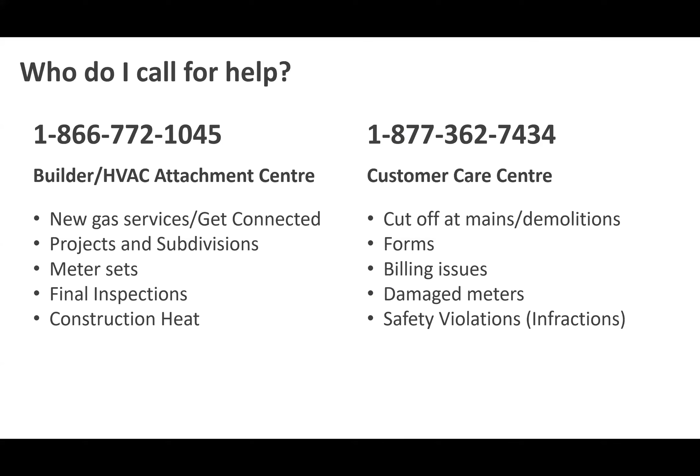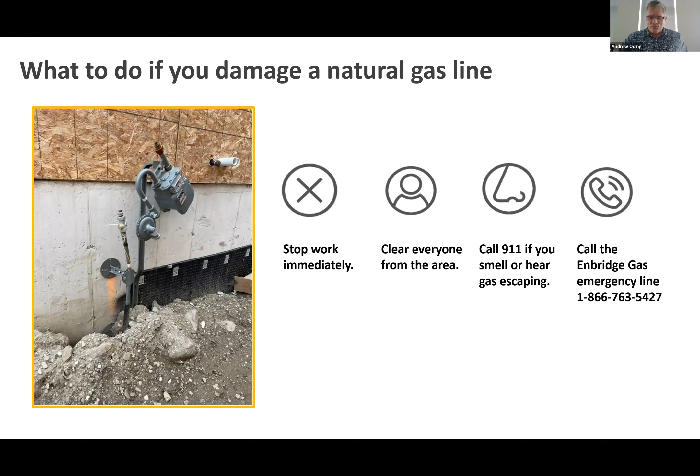And speaking of damaged meters, we always like to include a quick little safety moment in all of our meetings. And I thought it was a good time just to kind of review what happens if you do damage a natural gas line or a natural gas meter. You know, we're all human, accidents do happen. So if this happens, we ask that you stop work immediately, clear everyone from the area, call 911 if you smell or hear gas escaping, and then you can call our Enbridge Gas emergency line, which is 1-866-763-5427, and then we'll get our teams dispatched to take care of that.

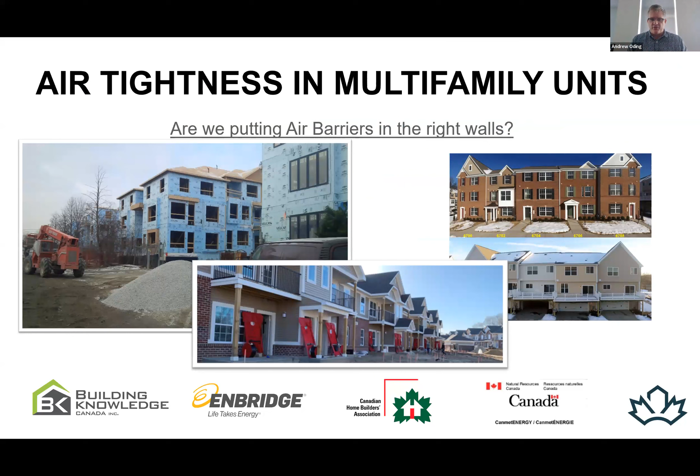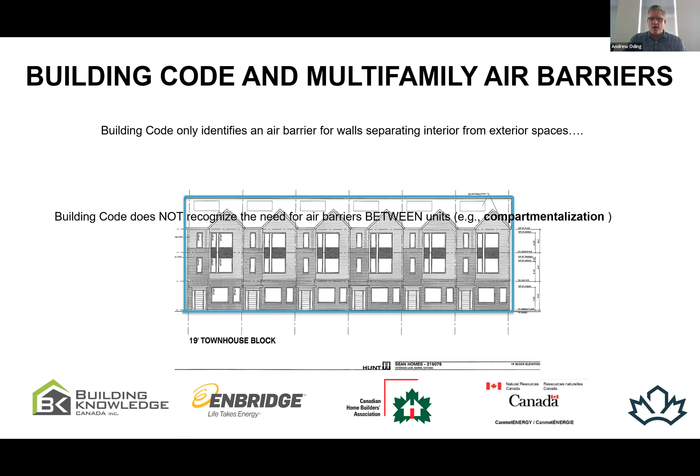So I'm going to jump into a very quick presentation, and really the idea, the concern we have in the industry, and this has been ongoing, is: are we really putting air barriers in the right walls when it comes to multifamily units? The thing we need to understand is that traditionally the building codes in Canada have really only identified the air barrier around the outside of the building, and they have forgotten about that air barrier between the units. This is what this study is about, this is what the conversation is about.

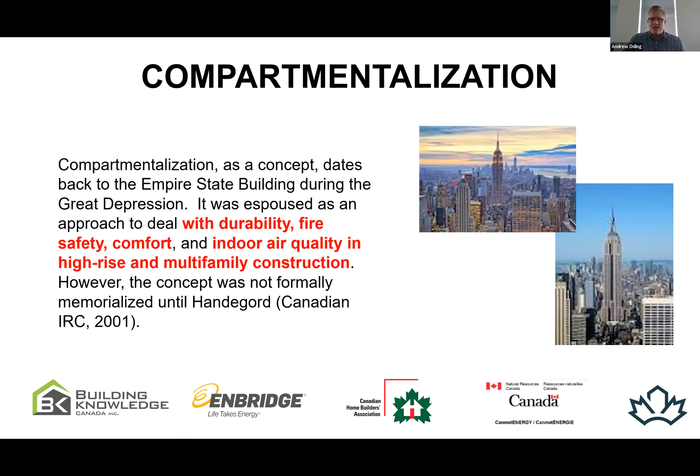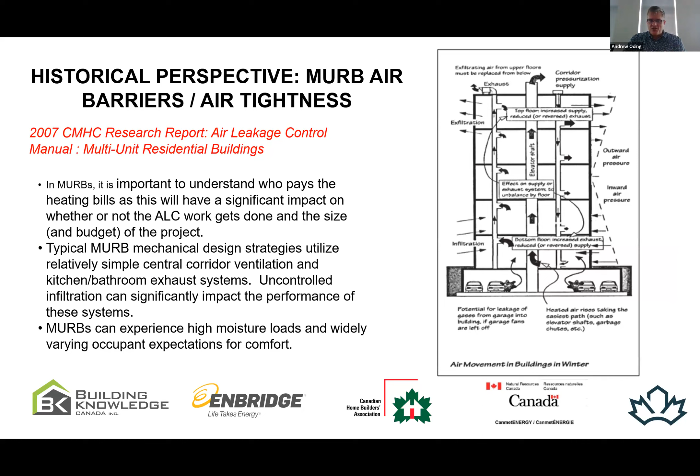The term we often use for putting air barriers between suites inside of a building is very old, identified during the construction of the Empire State Building: compartmentalization. If you go back to some of the original Building Science Digests, that was Handegord and Hutcheon back in the day, Canadian IRC 2001, there were even write-ups about the benefits of compartmentalization. Just a little historical context: there was also early 2000s research done by CMHC that identified the benefits of air barriers between units in multifamily buildings. And it isn't just energy, it was also about health and optimizing mechanical systems.

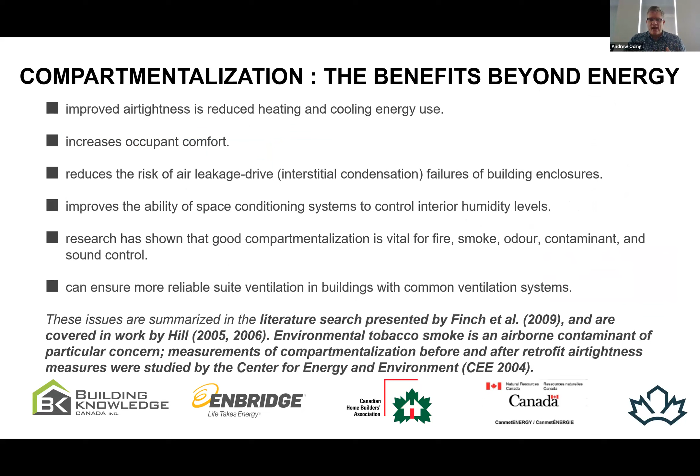Another study done in 2005-2006, you can look this up, was done by the Center for Energy and the Environment, CEE, by Finch and Hill, which identified that air tightness improves not just heating and cooling, but occupant comfort. It reduces odors, and it gives the mechanicals the ability to actually work in a building, and the ventilation systems.

The one thing we do need to understand, though, is if you ask any energy advisor across Canada today running these big red blower doors on multifamily units, and in the US where they're running blower doors as HERS raters, they will tell you that the air leakage, when you do a single point test on a middle unit, about 30 to 40% of the air coming into the unit is coming from the neighboring suite. And that is typically for a 1 hour design, a 1 hour double stud offset design.

Often in our industry, we've been told, well, you can do guarded testing, you can do multiple doors, so you depressurize the neighboring units and then you get a real test for that middle unit. The problem with guarded testing is it's very expensive, it's not easy to do.

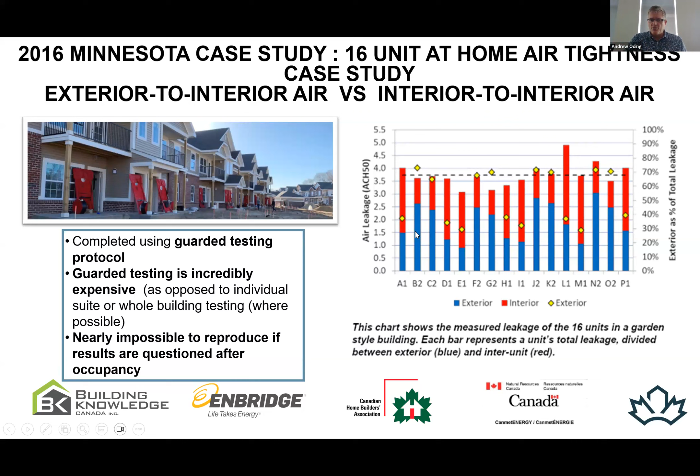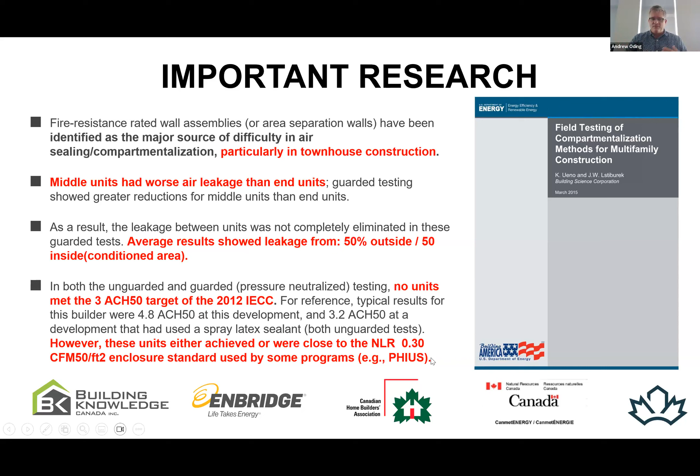Another study you might want to look at that's been formative is a study done by the Department of Energy in the US. This identified that when we look at these townhomes, there was tremendous leakage between units on middle units. They suggested that 50% of the leakage was coming from the neighboring units. They looked at that in developing the IECC3 air change target and found that a lot of multifamily units, even in the US, couldn't even meet the 3 ACH, and that typical results were more between 4 and 5 ACH. We now see programs move to that point, like PHIUS and others, instead of using ACH, they've moved to NLR, which is a different metric.

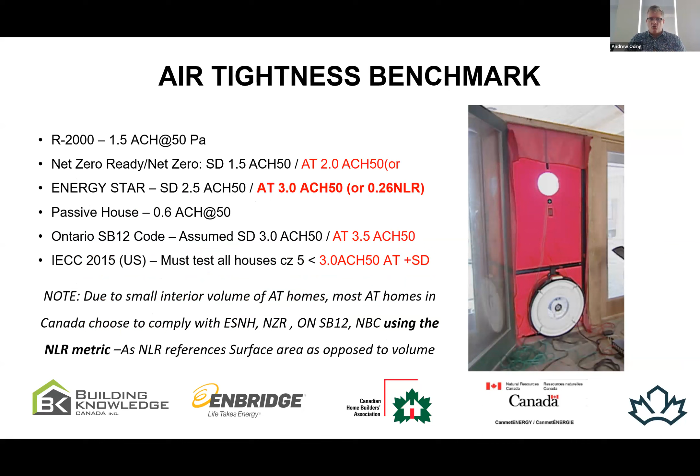We'll leave this with you to look at later on. The study suggests why the move from ACH to NLR was important. Here's some baseline references as to what the air tightness standard is for multifamily. AT here stands for attached units. You'll see that Net Zero Ready in Canada is 2 air change or the NLR equivalent, 3 air change or the NLR equivalent, and so on. These slides are just for your reference.

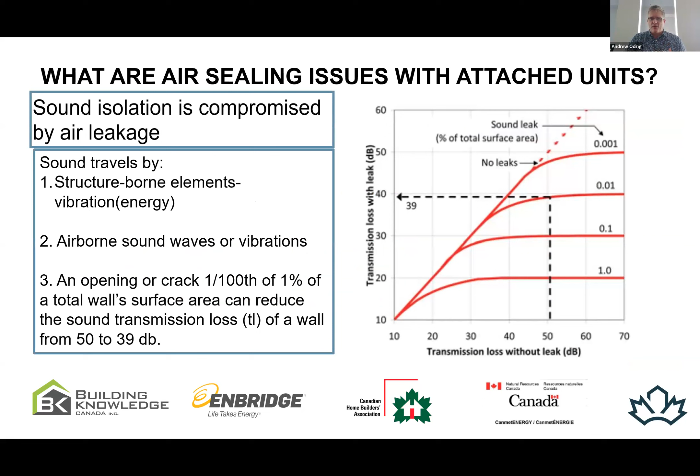A little study done by the Owens Corning team a number of years ago showed that when you have holes in demising walls, it significantly impacts the sound transmission. Even a tiny crack can actually decrease the sound attenuation performance. One of the solutions to this in Canada over the last 10 years has been to put an air barrier material in this one-hour assembly, and this is sort of standard practice here. The only issue is there's nothing in the code to guide this.

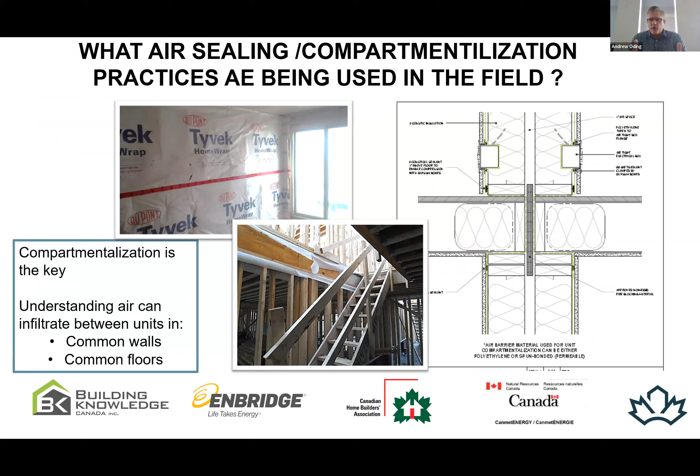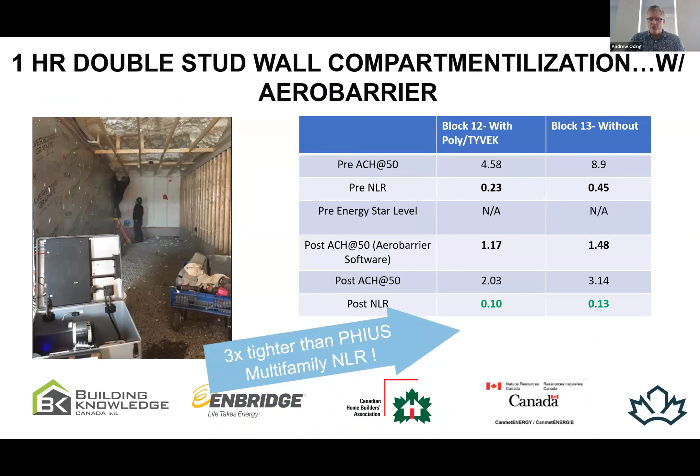There's often been the question, well, what if we add this spun bonded polyolefin to the assembly? What does it mean for the fire rating? Hopefully Michal Bartko, our guest here, can help us with that. The other thing we see is products like AeroBarrier that can help with compartmentalization and get down into some of those low NLR, low ACH ranges.

All right, I'm going to pass over to Frank Lohmann. Frank, if you want to give us a little bit of context from the point of the industry, the home building industry, and the Canadian Home Builders' Association.

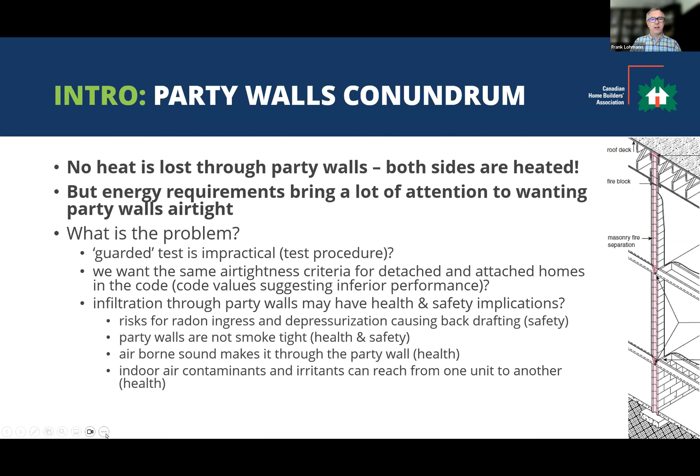He mentioned the safety and health implications as well, but this is outside energy, of course. So it would be to build better practice party walls to really manage, for example, radon ingress or the risk of depressurization, to make them smoke tight, not just for indoor air quality irritants, but also for, who knows, cannabis, or maybe even smoke from fire. You mentioned the airborne sound as well. So all of those are really good reasons to build the party walls airtight.

And what we found about, I think it was 2020, Michal may correct me, is like if someone wanted to do it better and right, what is the best way? We started looking, and Andy said, yeah, there isn't really much in the code. There's some stuff in the builder's manual, CHBA's builder manual. I'll show you a few snapshots in a second.

And then there was, I guess, a difficulty with offset exterior walls meeting party walls - how do you detail that? And there are other construction process related difficulties sometimes, because if you have multi-story attached units, there's often openings being left in the entire unit for trades to make it easier to pass from one unit to the next.

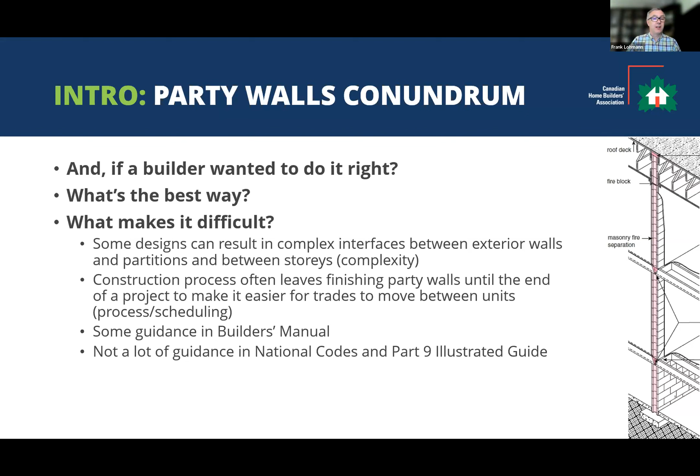And then they get left open until the end, and sometimes those closings lead to some leakages. And as Andy said, there isn't much information in codes, and not even in the illustrated guide.

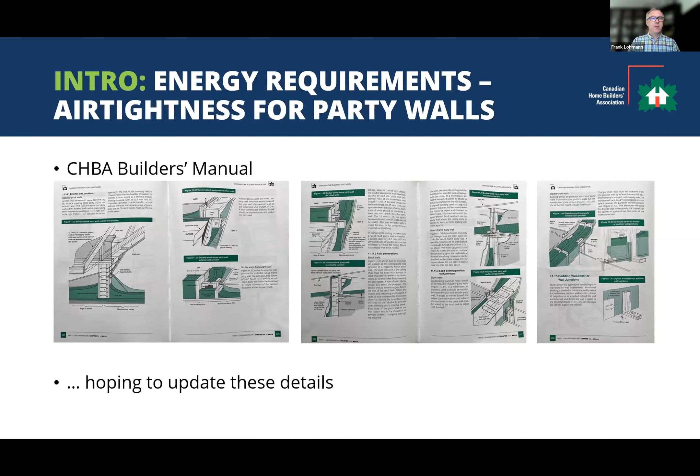I'll show you just snapshots I took this morning from the CHBA Builder Manual. I'm not going to go through those in detail, but there's quite a few different approaches, whether it's masonry, curved, offset walls, or double stud.

So in a nutshell, what's the problem? Well, the common part of all the problems we just discussed is that they deal with air leakage. But what's not known, or hasn't been verified until this point, is what actually constitutes best practice. Is it fastener? Is it openings? And I'm hoping that Michal will talk to us about that.

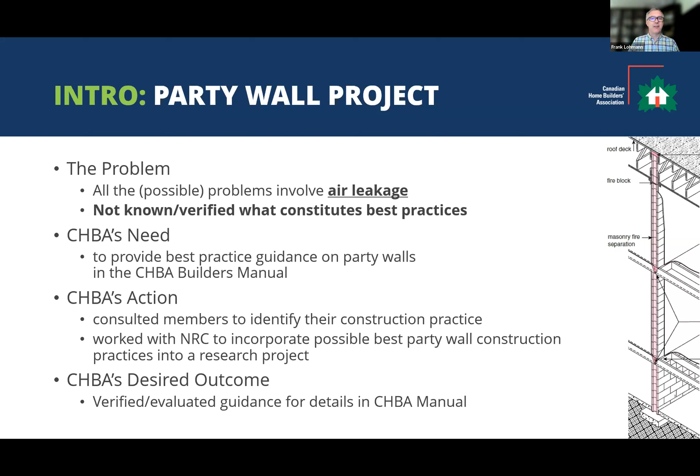And so what was our need? Well, we wanted to really nail down what best practice is so that we can broadly communicate this, include it in our manual, and also communicate it to our members and others in the industry. Our action was, at the beginning of this project, to help NRC identify common and potentially best practice in the construction of these partition walls, so that NRC could incorporate them into an evaluation or verification validation project. So our wish was that we will have validated, evidence-based best practice in our manual.

And with that, before I pass it to Michal, we wanted to run a couple of questions by you, because there's still open questions and we'd like to know what in the last 2 or 3 years may have changed. I think it's Stacy or someone running those polls.

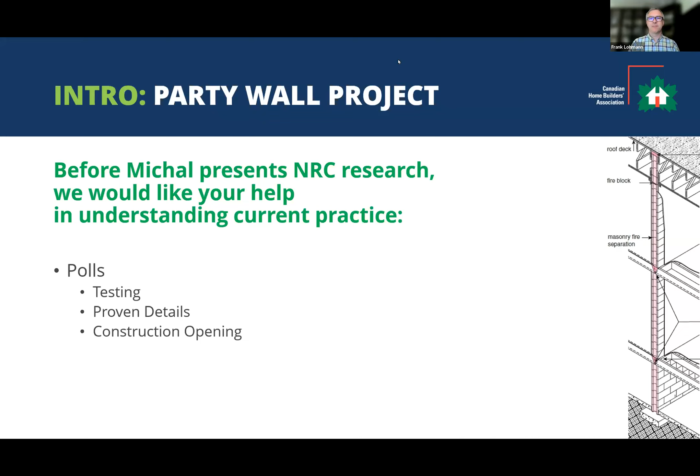Oh, there's the last one. Sorry, we did have one. Yeah.

So, do you have callbacks for noise or indoor air quality? Sorry, typo, I may have missed the I there. Indoor air quality, are there any effects of those we mentioned, non-energy related obviously, but that lead to callbacks? Noise is probably the biggest one we could add to our list of benefits of doing this airtight.

By the way folks, when you do give answers it is anonymous, so if you say you have issues we can't actually track it back to who put the answer in. So just be open and honest about some of these things.

We do know in general that since the requirement for air tightness and better air tightness in homes has occurred in the building code, we have seen an increase in warranty claims around sound and odor transfer concerns between units. So this is interesting.

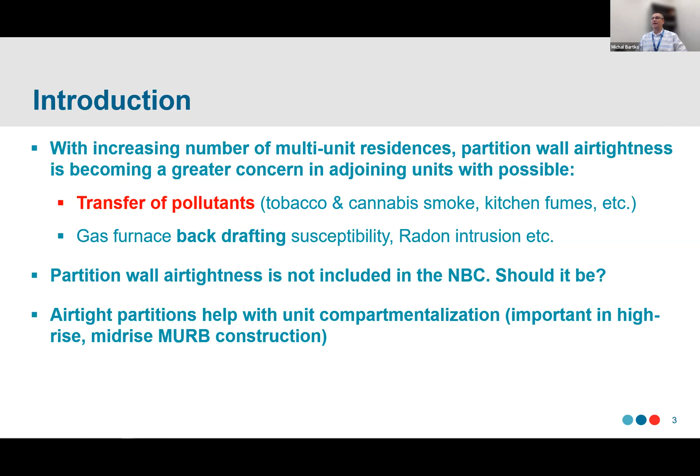We believe so. And also, as I believe it was Andy who mentioned, compartmentalization is a great benefit, and airtight party walls definitely help with that.

A little bit about background on how this project came about. At the beginning of 2020, over 3 years ago, we approached our key stakeholder, the Canadian Home Builders Association. With their help, we were able to gather data from the CHBA membership, giving us the input on where the industry stands in phase one.

Then we created a small committee and had several meetings. We introduced the project, asked the questions, gathered the answers, and by the end of 2020 we had approved a list of specimens to be tested in phase one.

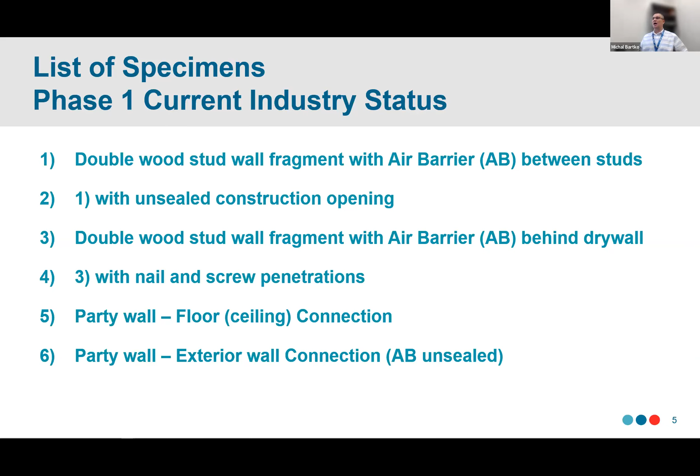I'm not going to spend too much time on this slide because I'll be talking about each specimen in more detail so you're aware of what we did in phase one. It's enough to say here that we tested 6 specimens.

Specimen number 1. Based on the input we received, we defined specimen number 1 as a double wood stud wall with an air barrier in between the studs. On each side we have a drywall system, fire rated and regular, then a 2x4 wood stud filled with insulation, which is fiberglass acoustic insulation, not thermal.

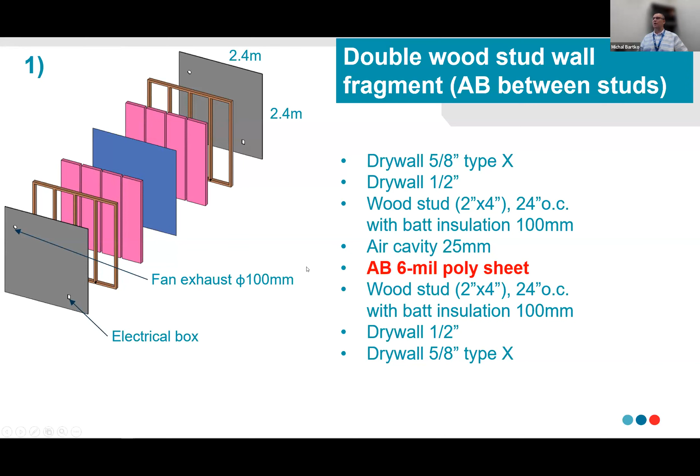Then in between the studs there is 1 layer of 6-mil poly sheet, attached to one of the studs, with the assembly mirrored on the other side. The poly sheet was attached on one side, with a 1-inch air cavity in the assembly allowing the air barrier, the poly, to balloon a little bit. I'm giving away some of the results here, not saying this is inherently a good thing, but this is how we built specimen number 1.

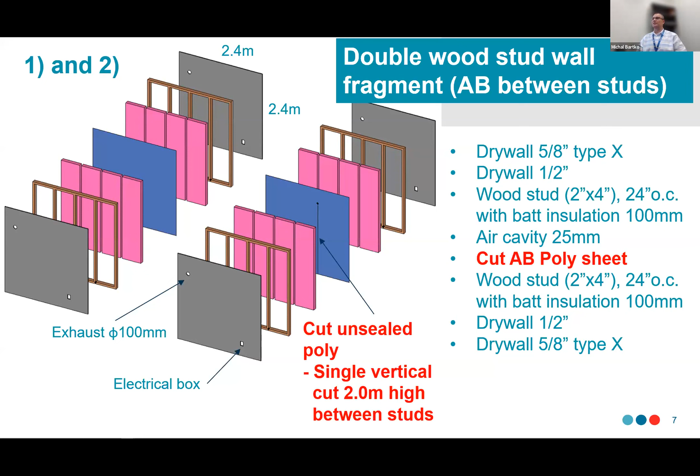We hear, and we could see in the polls, that these things happen on site. So the effect of such things on air leakage was investigated.

Specimen number 3 was similar, again a double wood stud 2x4 with identical drywall systems on both sides. The difference is the poly sheet was not between the studs, but there were 2 of them on the outer side of the wood studs. In phase one, we only tested 6 mil poly, consistent with the input we got three years ago.

I don't know if I mentioned before that the specimen size was 2.4 by 2.4 meters for all specimens, because this is the size of the facility we have at NRC.

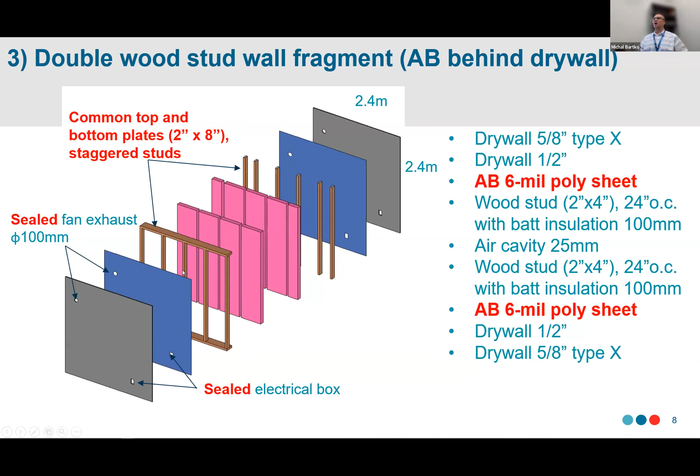We also investigated the effect of openings or penetrations into the drywall system, as well as the poly sheet in this case, with an electrical box installation and a simulated exhaust fan penetration.

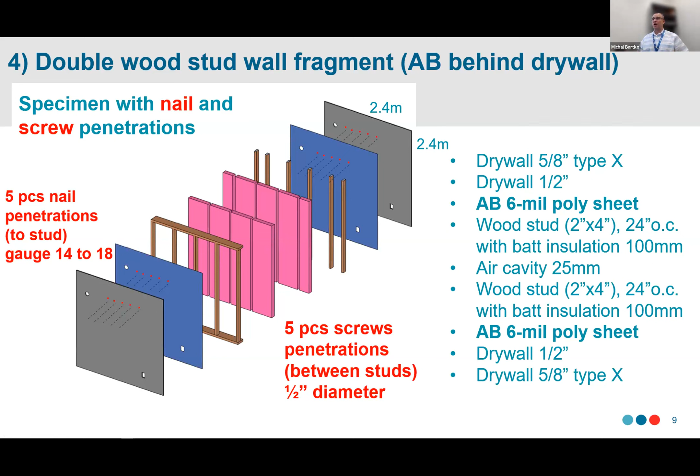Specimen number 4. There was a need to address the effect of penetrations — you're in your living room and you want to put a painting or mirror on your party wall, which causes air leakage penetrations. So we installed 5 nails into the stud locations, penetrating the air barrier poly sheet and attaching to the studs, and 5 screws with nylon plugs going through the drywall and the air barrier on both sides.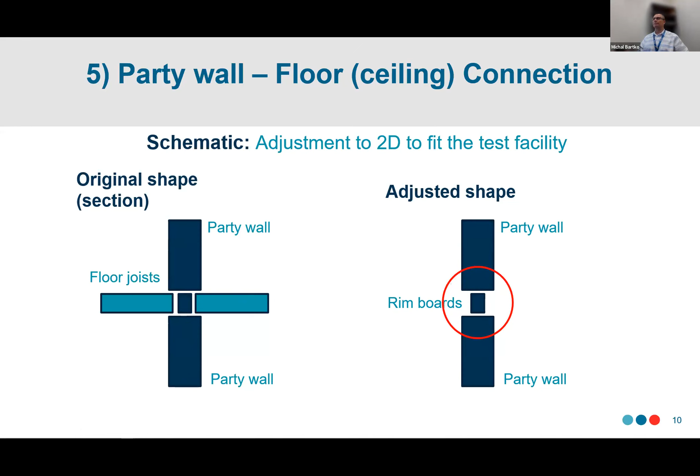Specimen number 5. It was believed we should test the party wall and floor connection detail. On this slide I'm presenting adjustments we had to make because our facility can only do 2-dimensional specimens, while the detail on the left is 3D. This is the party wall of the lower floor — a vertical cross section showing the lower floor party wall, floor joist, and the top floor party wall. We removed the floor joist, leaving just the rim boards in the specimen.

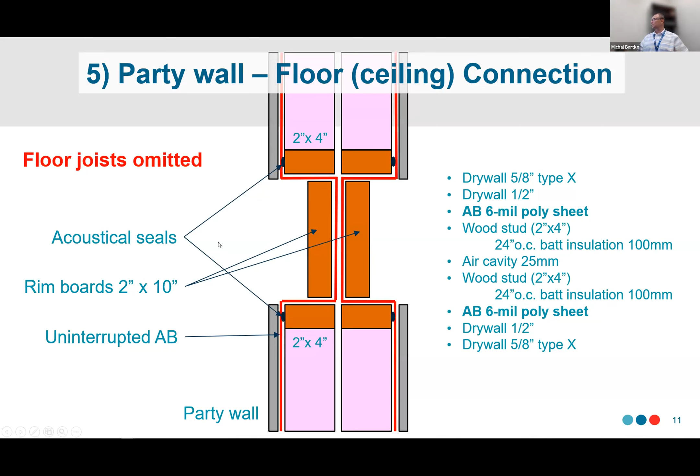We used a 2x4 wood stud with a poly sheet air barrier on both sides, and the poly sheet was interrupted and sealed for the bottom floor around the rim board, and again for the top floor. So we had 3 pieces of poly sealed together in 2 locations. Rim boards were 2x10, which we believed is identical to what's commonly used in construction.

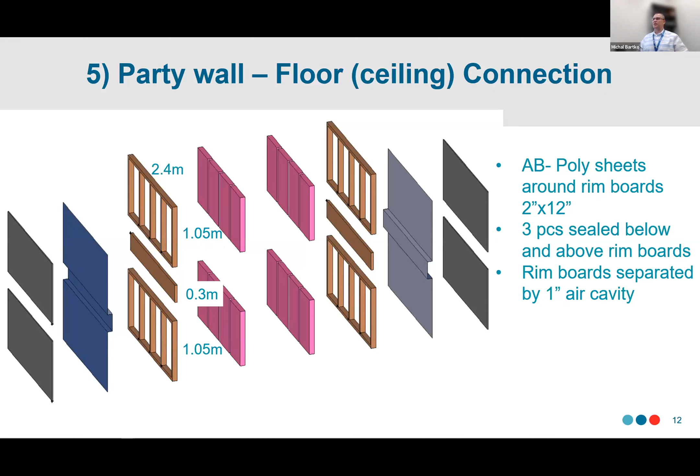Again, this exploded diagram is just a repetition, prepared for our technical officers so they know how to build the specimen with the correct dimensions. And here is specimen number 6, which is a connection of the exterior wall with the party wall.

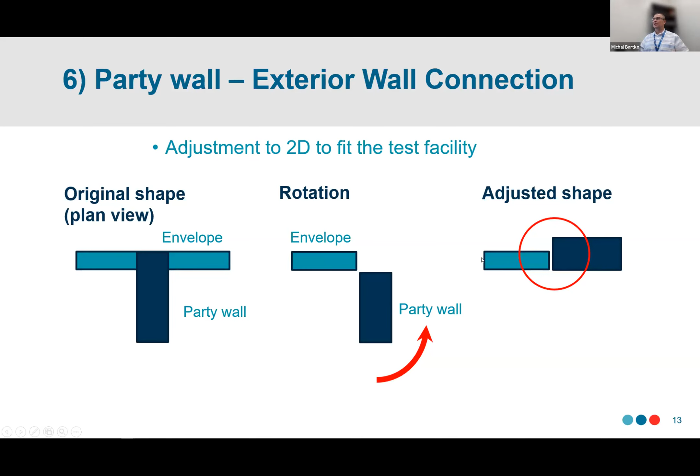Again, 3D had to be adjusted to 2D. Basically, what we did is we removed the portion, shortened the party wall, removed the section of the envelope, and rotated the party wall into one level. This is as close as we could get to the reality.

Again, having the limitations of 2D testing assembly, testing facility only, this resulted in this detail: on the envelope side on the left, we are using 2x6 wood stud with a poly on the interior side and Tyvek weather barrier on the outside. We ignored the air cavity and cladding; we didn't deem it appropriate or important for cladding to be included in this assembly.

And again, on the party wall side, two wooden studs 2x4 with a poly sheet on both sides. One important note here is that this detail, the connection between envelope and party wall, was not sealed. The poly sheets were not connected.

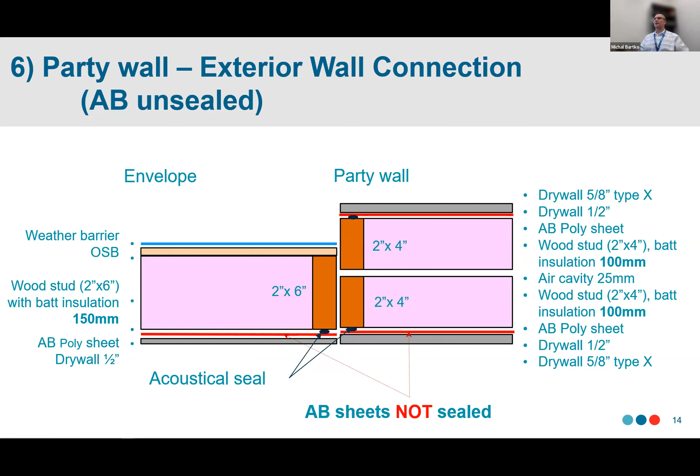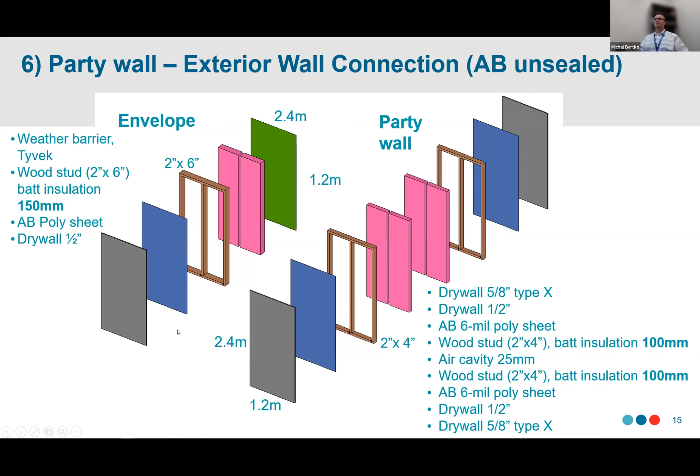We were initially going to run the test with poly unsealed versus sealed, but as we'll see from the results, it was not necessary because, I'm getting ahead of myself, the leakage of this wall was zero, probably because the two drywall systems were mudded together as they would be on site. Again, this is the exploded diagram, building envelope on the left and party wall on the right.

Okay, so these were the specimens.

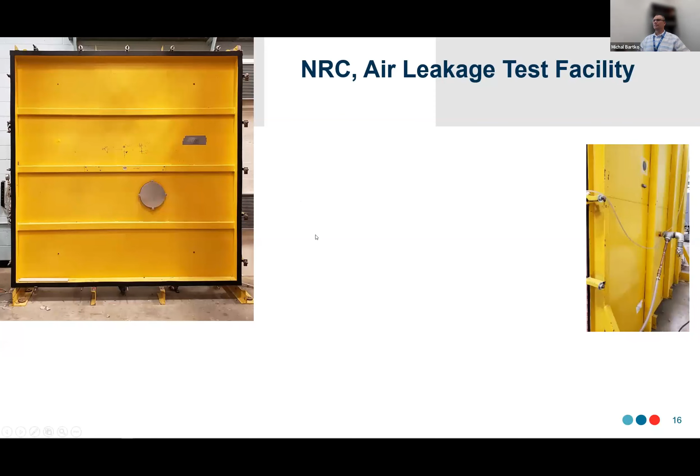And this is the facility we have at the National Research Council. It is a metal chamber, not too deep, maybe only 15 centimeters deep here on the right photo. Airtight, and we can see the hose and air inlet from the back, which is in this location, with dispersion of air so it's not focused on one area only, but spread regularly along the chamber.

So then we install the specimen against the chamber, as we can see here, and via our vacuum or fan, whatever we call it, with the data acquisition system, computer, and pressure sensor system, we were able to put air inside or actually take the air outside. So the fan or vacuum worked in both directions, meaning we could introduce positive and negative pressures on all the specimens.

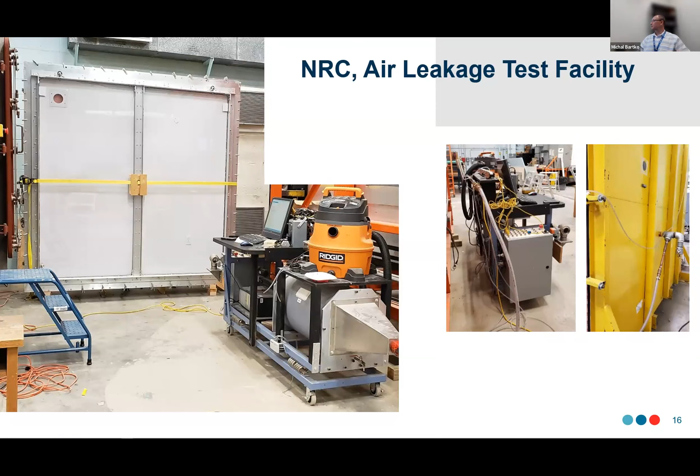I hope I didn't miss anything, and I hope this makes sense. So let me continue to the test procedure.

There is no ASTM standard or any other standard specific for party wall testing, so we adopted what is available: ASTM E2357, standard test method for determining air leakage rate of air barrier assemblies. The standard says, and we followed this procedure, that each test must consist of at least 7 points in one test, 7 points being different pressure levels.

So we were varying pressures from 25 pascals to 300 pascals, obtaining those 7 points in between: 25, 50, 100, 150, 200, and so on. And we did 3 tests independently for each specimen.

The diagram on the right shows we have 3 tests there, and these are quite corresponding results. As you can see, all 3 tests showed quite identical airflow rate. The airflow rate was calculated using this equation in red, using flow coefficient and flow exponent extracted from the test equations on the right, and leakage at 75 pascals was calculated for each specimen, then these 3 values were averaged.

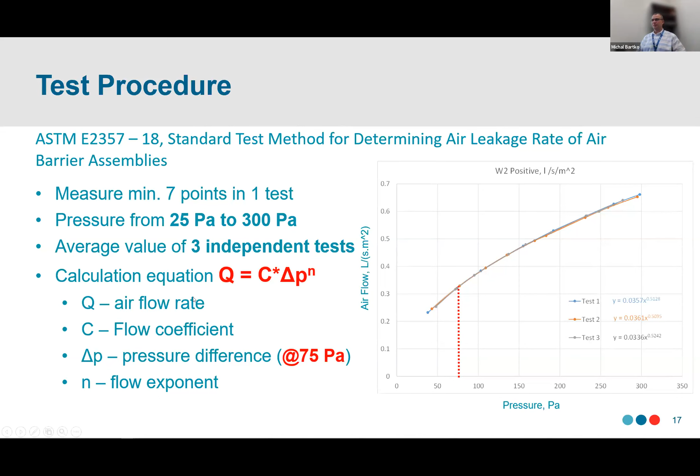I digressed. Coming back to the test results of phase one, I hope this is clear and nicely visible. I tried to make these small diagrams correspond to what is being written here.

This one, with poly in between, had quite large leakage. I must say I was a little surprised to see this, and also the difference between positive and negative pressures was considerable. Coming back to it, thinking about it and looking at the raw test data, we were able to determine that the ballooning I'm mentioning in the specimen was not really a good thing.

The poly was stapled to the studs, and as the pressure of 300 pascals positive pressure was applied, the air barrier 6 mil poly ballooned, and these connections at the places of staples were just torn. That's an assumption, we didn't open the specimen yet. We will do it in the near future, and then this assumption will be confirmed or not. I cannot tell you at this point.

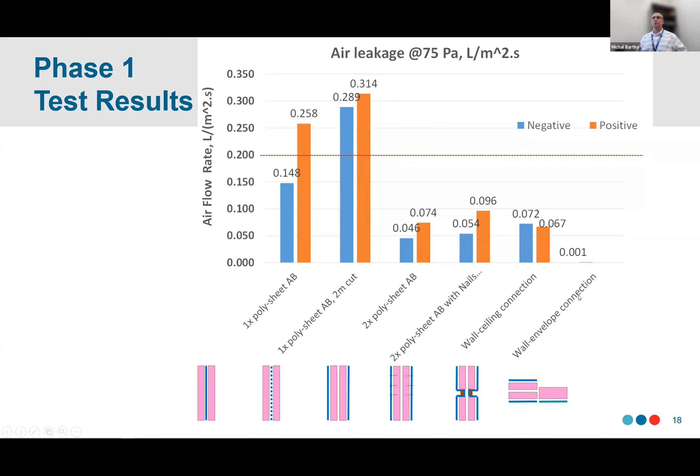Maybe now, if we took that specimen after 3 years and retested it, with some cracks already, the result would be different. We didn't test that just yet.

Okay, so I'm concluding phase 1. We were anticipating that specimen 1 would have lower air leakage because there would be no penetrations. In real life, most probably they will not, because there is never a 300 pascal pressure difference on each side. We get maybe 10 or 20 pascals, maybe if there is a stack effect. So the result might be a little bit skewed by this fact. Nevertheless, this is what we get, this is what we presented. The difference between positive and negative pressure tests could be due to valving and/or ballooning.

And then specimen 3, air leakage was lower than the previous specimens. Again, we are assuming that since the air barrier, the 6 mil poly, was firmly held between the studs and insulation on one side and the drywall on the inside, there was no movement possible. The air leakage was much smaller, much better.

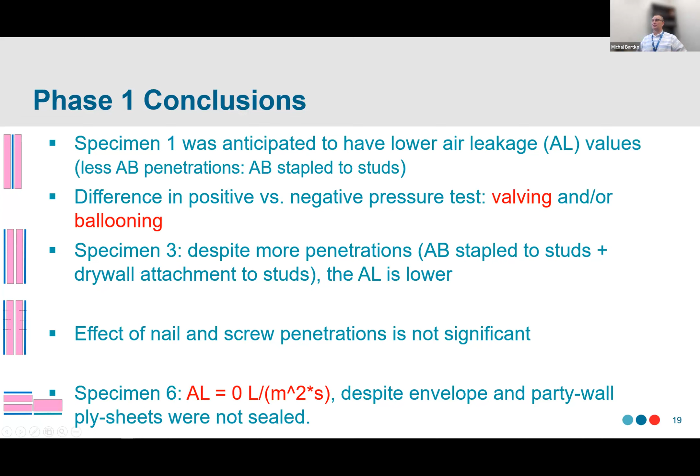The effect of nails and screws was there a little bit, but it was not significant. And again, as already explained, specimen 6 was not leaking at all, to our surprise.

Once all these tests were done at the beginning of year 22, basically 2 years after the project came to be, we elaborated the interim report, published it, and presented the results to that small committee of CHBA membership, with questions like: this is what we get in the first phase, and what should we test next so that we get good input data for the future code change request?

Then specimens 5 to 8, as I mentioned on my title slide, there was a suggestion that if this is new to the code and we're going to use spun bonded polyolefin membrane, there's no acoustic and fire evaluation for those. So I compiled this list, came to my superiors, the decision-making people, and said people want to do this, give me the money. And believe it or not, they did.

So I'm going to talk about the next steps chronologically. As a first step, fire testing was done. Our fire department was keen to test these new specimens, and I was able to proceed fairly quickly with them. That group has its own facility, called the NRC Wall Furnace Test Facility, and there's a standard procedure to run such tests.

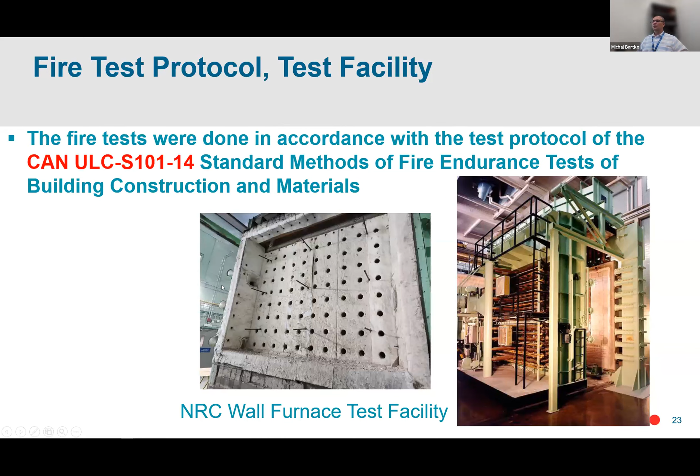In the facility, you can see the gas pipes leading to burners evenly spread over the area of the specimen inside the chamber. They also have cameras—two on the side—so they can monitor what's going on in the chamber, because it's sealed and tight and we can't see the fire from the outside.

So again, those specimens 2 and 3 from the previous list were built. The size is different—we used 8 by 8 feet for air leakage testing, but the facility for fire evaluation uses different specimen sizes, 3 by 3.6 meters, though the assembly was identical.

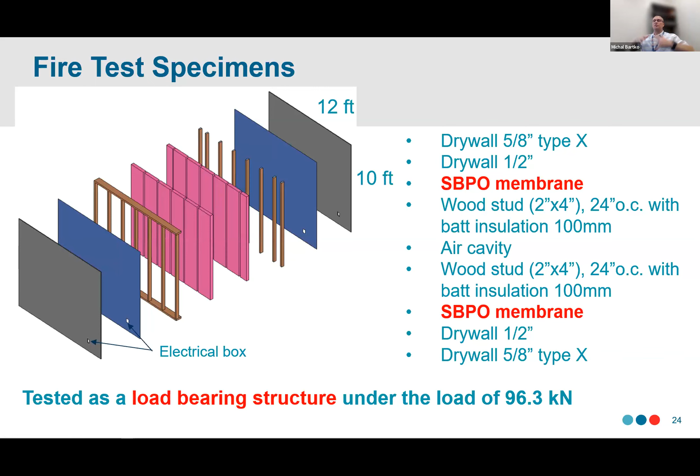I also had a specialist calculate the load bearing of that wall, so it was tested under a 96.3 kilonewton load from the top.

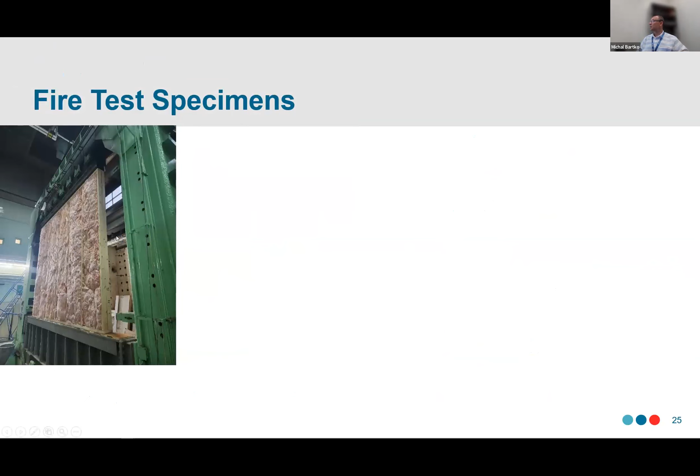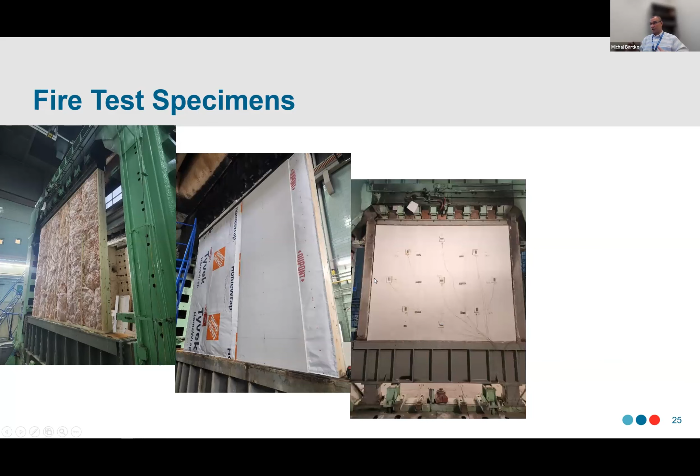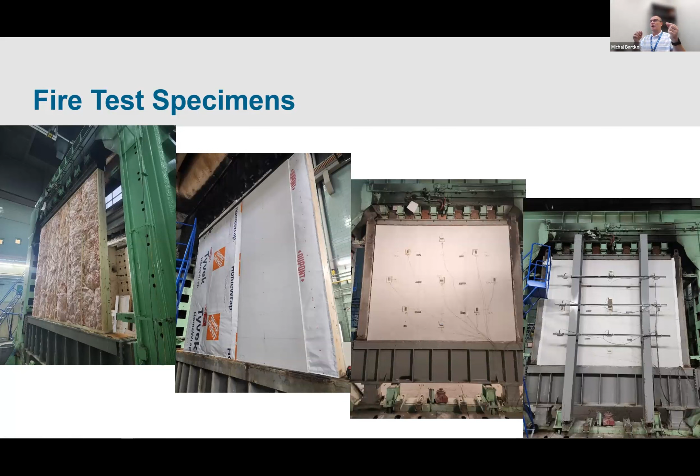I'm including some photos of specimen building. We can see double studs here with fiberglass insulation, then the stage where spun bonded polyolefin has been put in place, followed by the drywall system. The specimen, according to the dimensional standard, was instrumented with temperature sensors in this array, plus displacement sensors. Since the system on top was applying load, it was expected that at some point the specimen would crack and collapse, and the displacement sensors were used to see where and how much, and what comes first.

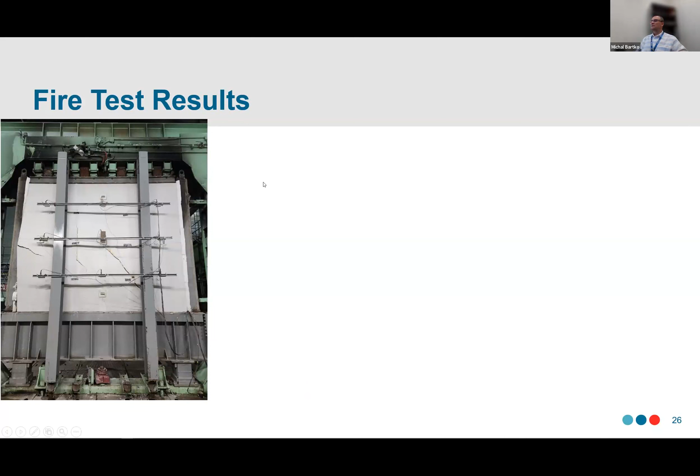It was fun, let me tell you—experiencing this test was really exciting for me. I'd never seen anything like that, and I'm showing you the results already. You can see the cracks from the displacement, and the collapse of the specimen is visible here. When the chamber opened, we saw the other side of the specimen exposed to the fire.

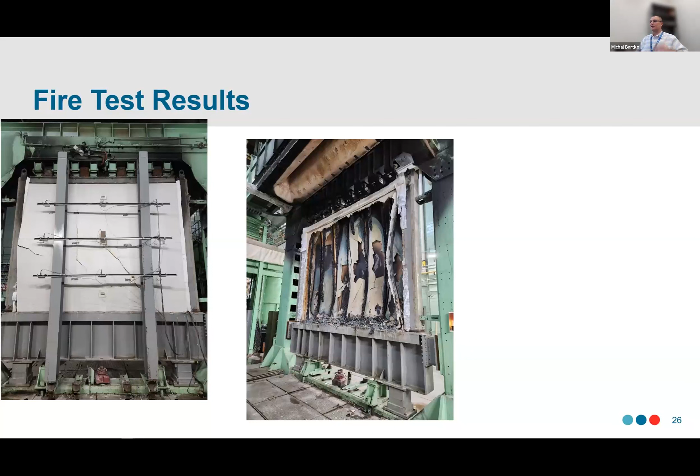I was surprised to see all the studs gone, yet the periphery frame could still hold some of that load until it crushed, of course. And then there's the detail of the electrical plug on the side that was unexposed to the fire.

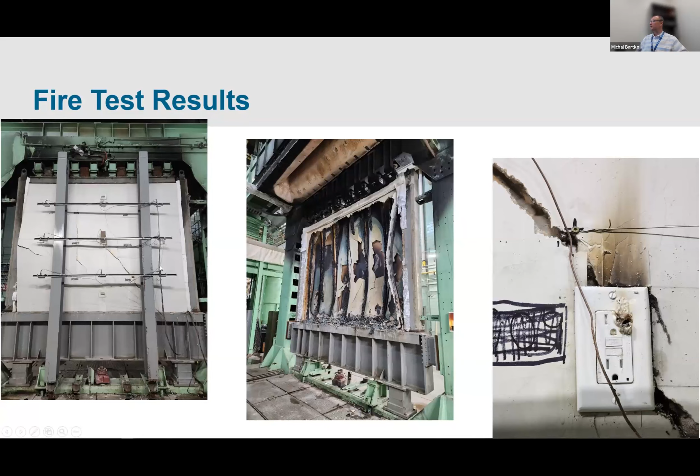You can see some smoke coming through and making its marks, but the test was interrupted as soon as these cracks, this collapse of the specimen occurred, which happened after 75 minutes versus 72 minutes for sealed versus unsealed spun bonded polyolefin air barrier respectively. What I mean by sealed and unsealed is that for unsealed, we used staples only at the whole area. For sealed, we had acoustical sealant at the periphery, and the penetration, the electrical box, was taped up, so there was no air movement. It gave us 3 more minutes. I was quite pleased with these results, and I hope that you are too.

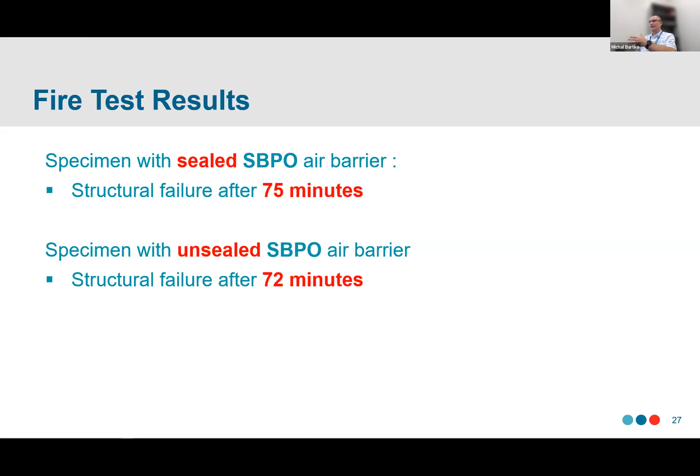Yeah, that is very interesting. Shall this make its way to the code at some point?

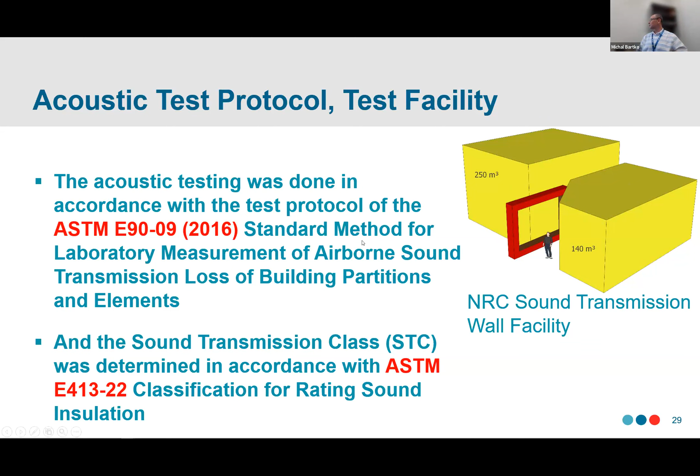So at the NRC sound transmission wall facility, I don't have a picture because it's actually a building. It's 2 chambers, really large, 250 cubic meters and 140 cubic meters, next to one another, with a spot where this red square comes - that's where the specimen is being put and will be slided into that facility. Then one chamber is a noise source, and another chamber is a noise absorber, and basically various noise levels are being monitored on both sides of that wall assembly.

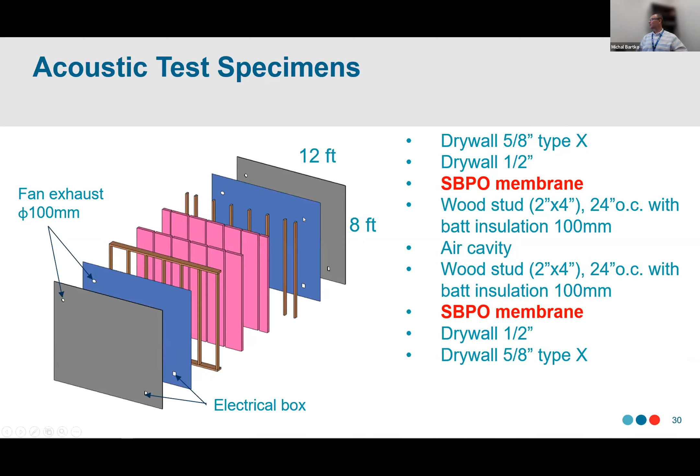Again, sealed versus unsealed spun bonded polyolefin membrane was used, and specimen size - it's actually unfortunate, I must say, that each facility has a different specimen size here at NRC. So we had 12 by 10 for fire, and we have 12 by 8 for acoustic.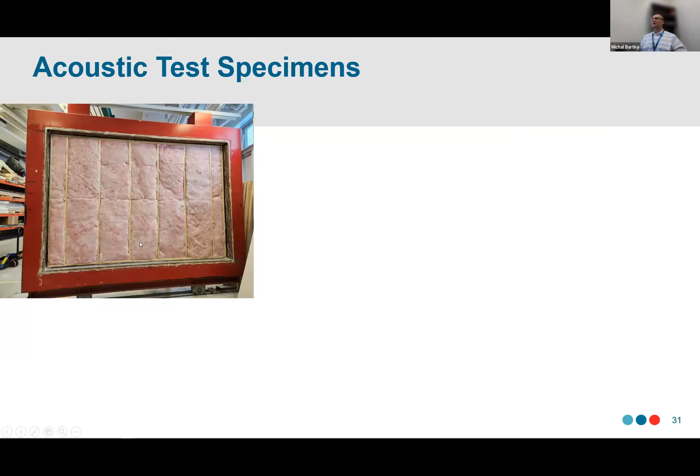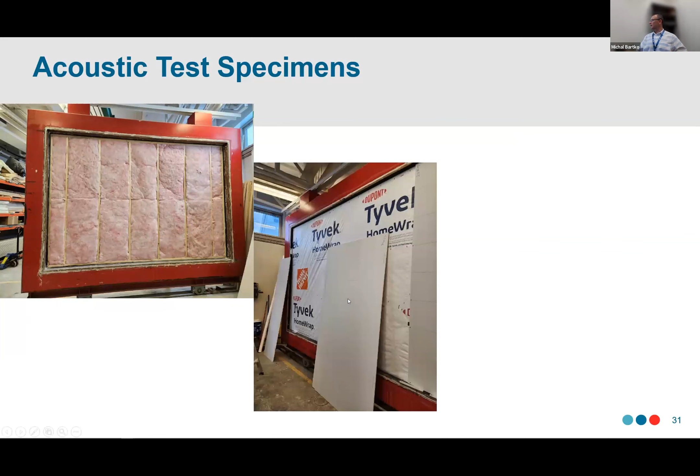So here is the red frame that I showed you on that diagram, and here is the building, the specimen being built directly into it. You can see on the bottom there are some wheels, some mechanism that makes this red square mobile. So basically, you build the specimen outside of that test facility, on top of insulation, some membrane, and drywall came. This is the final specimen in that frame, and one more photo where the frame was slided in between, and I am inside one of those chambers taking this photo.

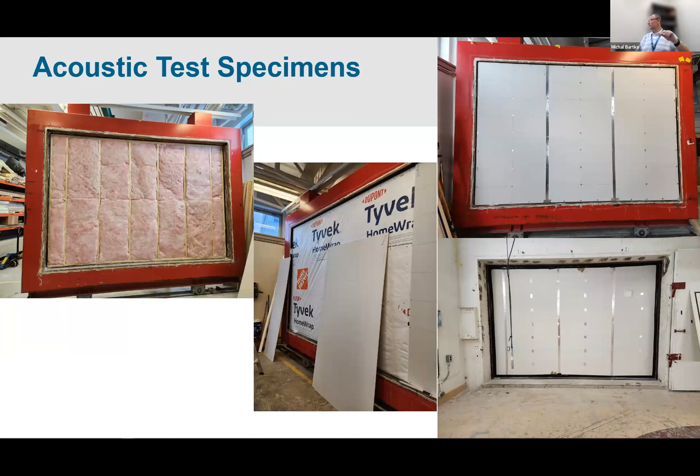Of course, during the test, you don't want to stay in. It's really noisy. It's a very strict test protocol. So basically, what happens? I do the photo, they drag me out, they lock the door, they take me upstairs, and they run the test. And from this control room, we are hearing noises - louder ones, less loud ones, high pitch and lower pitch. And here are the results.

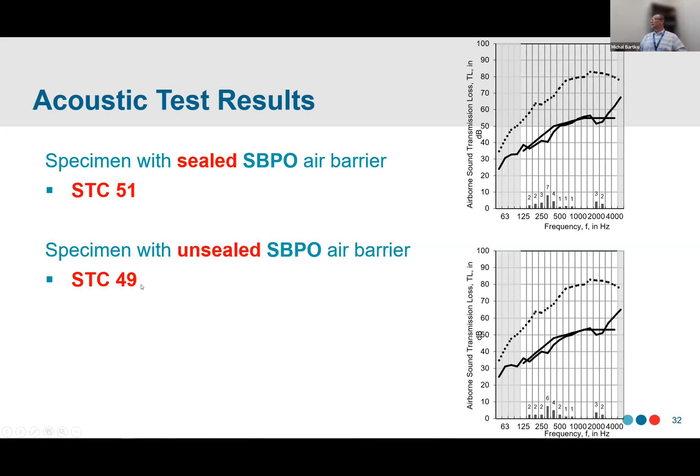Again, the open air, unsealed air is affecting a little bit the acoustical performance. So the sealed, or the lower air leakage, is just better for all purposes here.

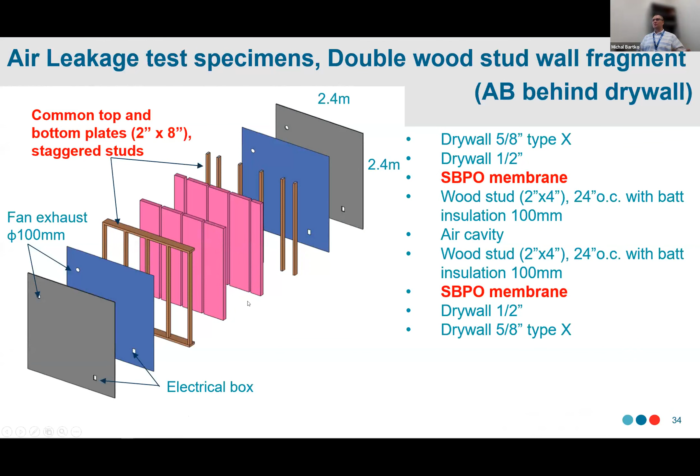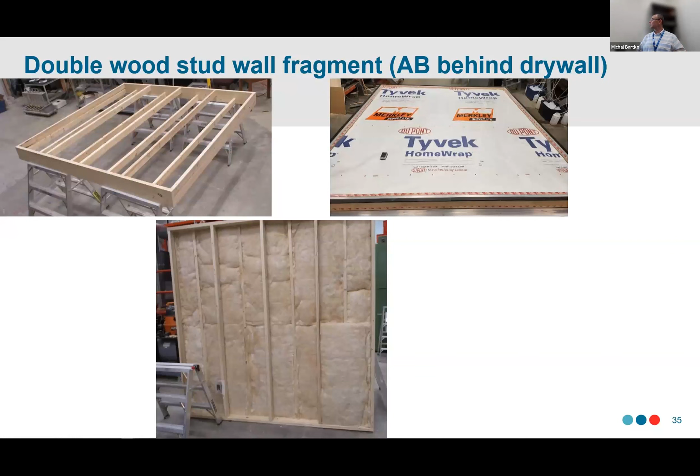Okay, and I'm coming slowly but surely to the end of my presentation. After these 2 parameters were evaluated, we built our specimen for air leakage. I'm not going to spend so much time on this slide, we have seen this a couple times. This is the procedure, how we built it. You can see staggered studs, unsealed spunbond polyolefin membrane, and the finalized specimen.

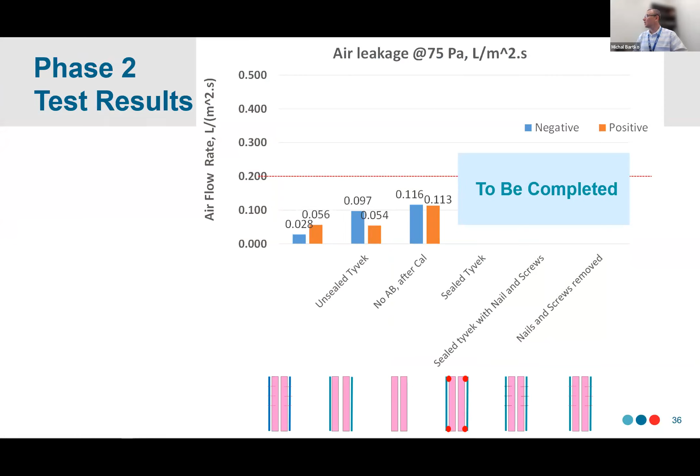Results - okay, this slide is definitely to be completed, and I'm not going to elaborate on it. It's just that it's too preliminary. We have still several specimens to complete the test. So conclusions are also not to be made at this point. It is to be completed in the near future.

But what I can tell you, the next steps are, in the coming 2.5 months, we hope to complete all the testing. Then I will be elaborating and publishing the final report for this project, including all the information, all the project, all 3+ years of it. And then the results will be published or presented to the airtightness task group. I believe that from that point on, I will be a member of the task group, so that we will be able to develop the code change request and collaborate with the task group from now on. And of course, being scientists, we will publish the results in journals and conferences. Thank you very much for your attention.

Thank you, Michal, very much. That was a very detailed update, and I know you folks have been working on this for a couple of years now. So we do have some questions. I see that Mark has been answering some questions in the Q&A. Let me just bring up real quick, just the fact that we are right now at Q&A. Hold on a minute here.

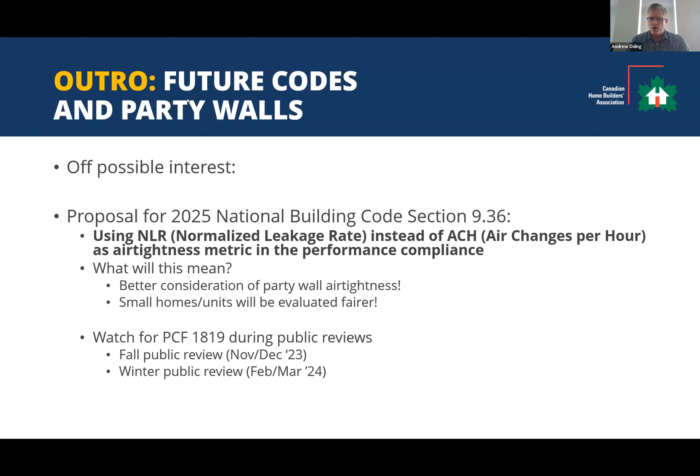Frank, I do want to make a comment here. Saki sent through a link and I checked the article. Saki, just to be clear, when Tyvek and DuPont are talking about interior walls in that article, if you go and read it, it's actually talking about interior walls between two rooms, not a demising wall between two residences. So it's a very different scenario. I want to be careful because it could be misleading, since what we're talking about today is not interior walls, we're talking about exterior demising walls between units. So even when you read around that comment by Tyvek DuPont, it's really talking about interior wall type settings. Anyways, maybe at some point we'll follow up with some of these manufacturers and give them a chance to chat. So very good.

We did have, let me just see here, one other question I thought was really good. Michal, Rick Grattan, actually Rick has been former chair of CHBA TRC, he's been a large member of the Canadian home builders community. Rick asked, are there any plans to do any testing like this for floor assemblies, unit over unit, or right now is it simply vertical assembly demising walls?

Very good question. There could always be a phase 3 to it. If there is a need, I'm sure our team will be more than happy to proceed with floor testing. Has there been talk about floor testing? No, not so far. But if there is a need to address this point, I'm sure the NRC team will be happy to work on this.